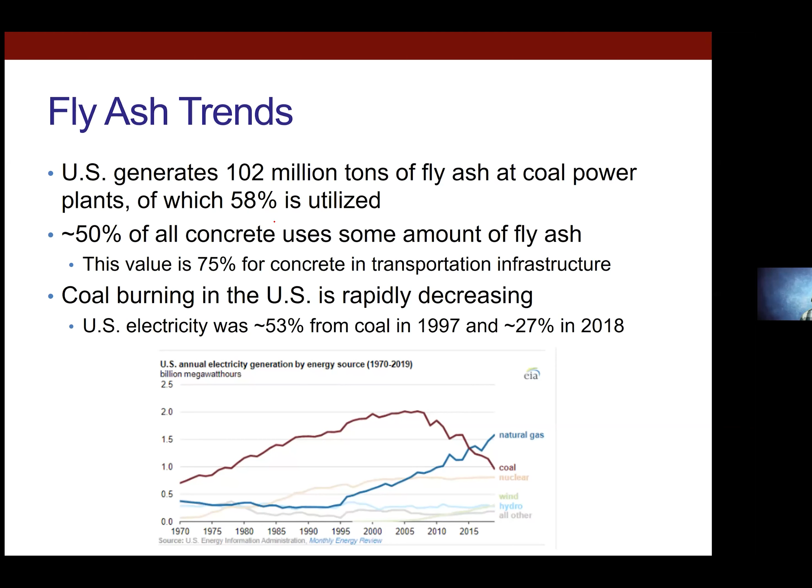So if we get rid of all of our fly ash, what do we do? I don't have the answer. I'm just saying that's kind of where the trends look to be going, so we might need to be nervous about that.

Let's look at slag, granulated blast furnace slag. This is another material that, where it's available, is used a lot. In Virginia, we don't really have a source of it, though you can sometimes import it. I know in Illinois there are some local places you could get it.

Here's the problem: supply currently meets demand, so we don't necessarily have that much extra slag lying around. The other problem is our future trends of blast furnace slag are going to be decreasing.

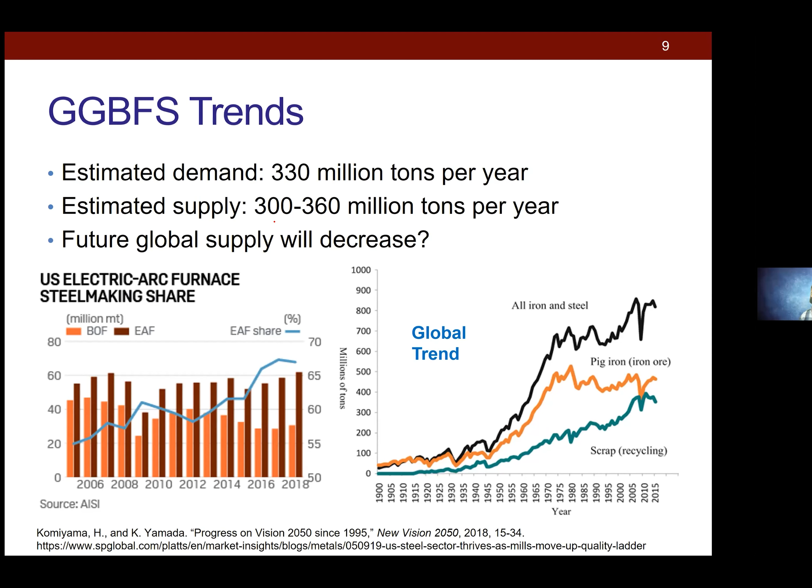If we look in the U.S., well, the U.S. never really produced much pig iron to begin with, but the U.S. is starting to tend towards more electric arc furnaces to produce steel, which is mostly scrap steel recycling, and that seems to be a global trend. So we seem to be recycling steel more than making raw steel from iron ore. That means our sources of blast furnace slag are going to decrease. So again, it doesn't really look like a viable outlook in the future.

What about natural pozzolans? We only produce something like 70 million tons of natural pozzolans worldwide, not enough to replace fly ash. The biggest problem with natural pozzolans is they're highly localized, with highly variable reactivity.

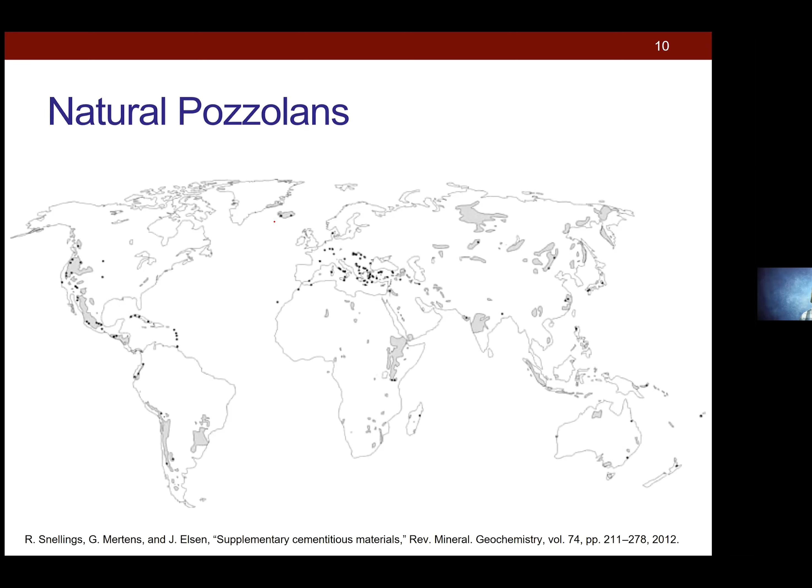Is it a future trend to use more of it? Maybe, but it's going to have to be regional. If we look in the continental US, where I'm in Virginia right now, yeah, there's no source nearby. That means it's going to be probably expensive. It's probably just cheapest to use straight cement at that point. Other parts of the world would be economical. So what's the future? I don't know.

If you look at the future, maybe geopolymers or alkali activated materials. If you're looking at a fly ash or slag-based alkali activated material, you're running into the same issue of supplies. There's a lot of people who like metakaolin, and it seems like a good idea, since the U.S. has some of the highest quality kaolinite clays in the southeastern U.S. and Georgia. We have a huge supply of it, but we're not making very much of it. There's only about 3 million tons produced per year, as opposed to fly ash right now, where we're using something like 100 million tons. So supply is not quite meeting demand yet.

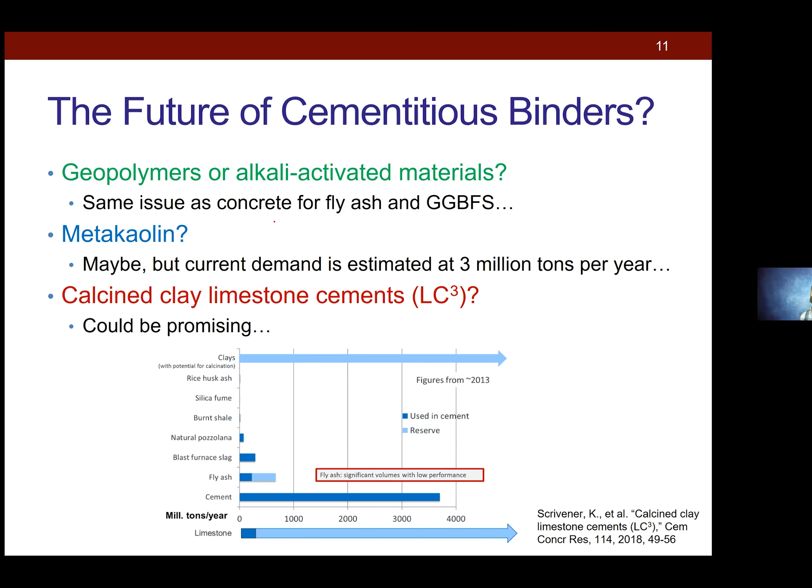Then there's this idea of these calcined clay limestone cements. Those seem promising. I haven't researched them, haven't looked into them. All I can say is what I've seen at conferences and things. So maybe that's where the trends are going. It's hard to say.

Regardless, cement's not going anywhere. Even though cement is the third largest CO2 producer in the world, it's a big industry. The cement sales in the US alone is $10.7 billion, and the US is only the third largest cement producer in the world. The US only produces like 2%.

Something like 2% of the world's total cement, and that's a $10 billion market. If we go to the global market, we're talking $680 billion. Going into the ready mix industry worldwide, it's over $1 trillion. So is cement too big to fail? I don't know, probably. We need cement, we use a lot of cement. So the question is, how do we make it more sustainable?

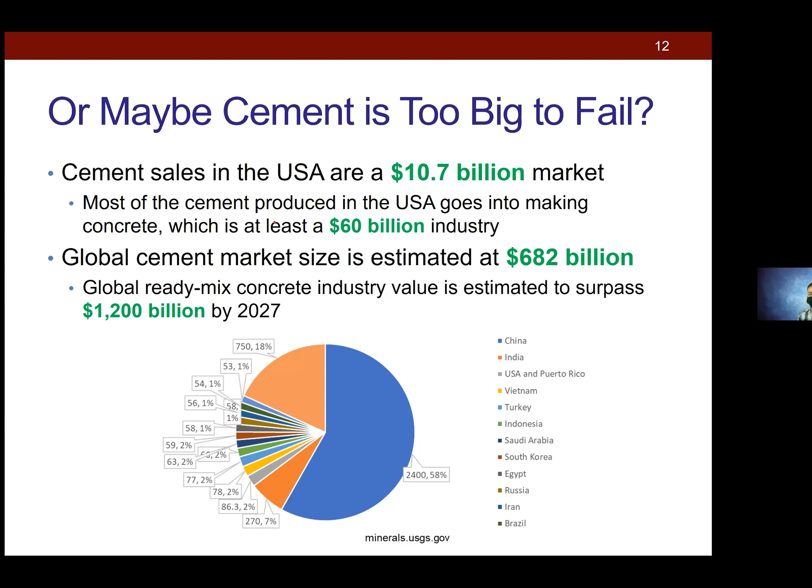If the question is we're not going to have much fly ash or slag going forward, what do we do? So my perspective now is, hey, let's look at these recycled aggregates. Let's just assume that cement's not going anywhere. We're going to be stuck with 100% Portland cement binders moving forward.

It's still going to be producing a lot of CO2. Maybe there'll be other advancements in CO2 sequestration or something. But maybe now we can at least recycle some materials, stop using so much raw materials.

Because we're also looking at other parts of the country that don't necessarily have unlimited supplies of high quality natural aggregates. Virginia is fortunate, we're one of the top 10. I think Virginia is the third largest aggregate producer in the US or something. We produce a lot of high quality aggregates. If you go to other parts of the country, that's not the case. So now they have to pay a lot of money to import it, or maybe they just look to use locally available materials. That's another way now to reduce our costs, reduce our CO2 footprint.

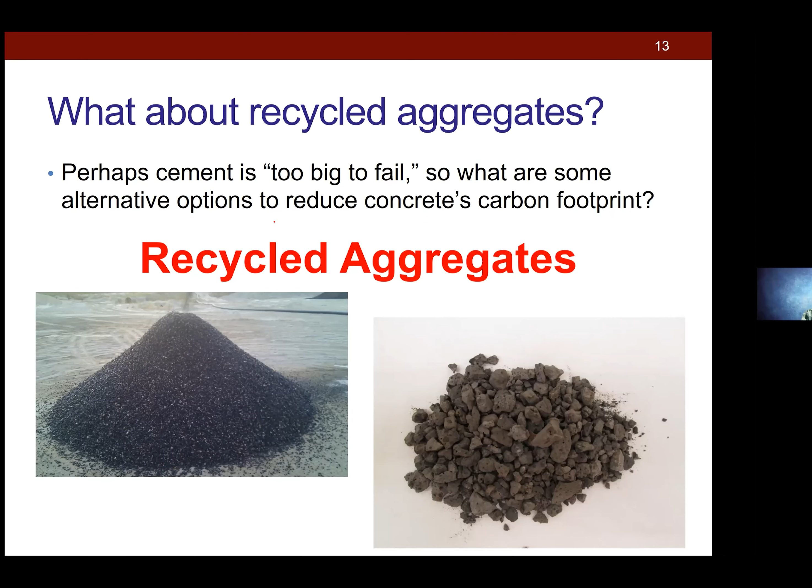So first thing I want to talk about is reclaimed asphalt pavements. This is near and dear to my heart—this is what I spent my master's and my PhD researching.

The idea here is that we produce a lot of reclaimed asphalt pavement in the US, well, in the world, right? I mean, what are the numbers? Something like 94% of all paved surfaces in the US are asphalt, right? So pretty large fraction—we produce a lot of RAP per year.

We reuse a lot of RAP, right? We do use a lot of RAP into new asphalt pavements, but we're limited to maybe something like 15 to 40% by aggregate content. In addition, a lot of the asphalt pavements tend to favor using the fines, which have a higher asphalt binder content. So that leaves a lot of the coarse fraction behind.

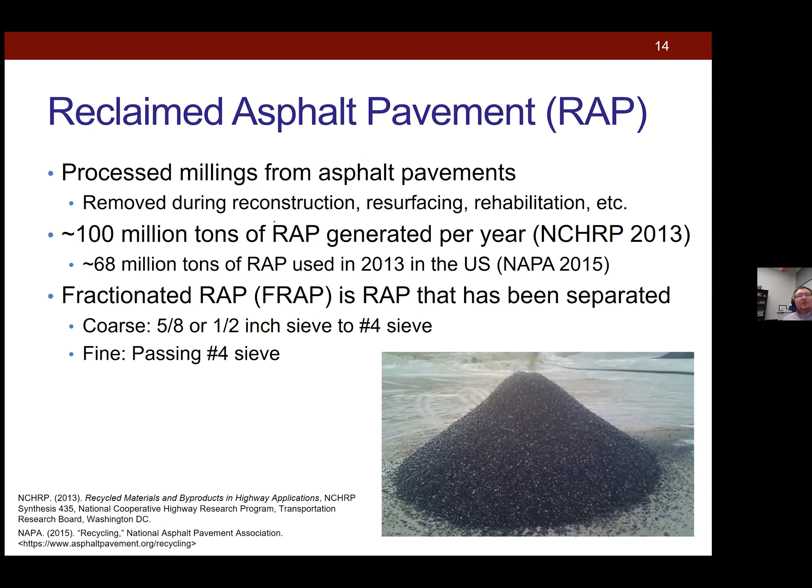So what else can we do with that coarse fraction? Well, hey, let's toss it into concrete. Problem: we reduce our strength, we reduce our modulus. Some other properties don't necessarily seem to be affected too much.

But if we're looking at pavement design, a lot of it is driven purely on strength. If you went to a contractor and said, hey, you can use this aggregate, it's free, you now don't have to pay for the aggregate—but you're going to lose 20% of your compressive strength—well, they're just going to laugh at you and tell you to go away, right?

So the question is, why do we have this decrease? And if we can figure out why we have this decrease, can we then figure out how we can mitigate that decrease, and actually improve the properties?

So this isn't as simple of a problem as just adding silica fume. You can look at a lot of your SCMs—if you add some slag, some silica fume, you typically will densify the ITZ, reduce some porosity, produce more CSH. That all sounds great, but we didn't see that effect with RAP in concrete.

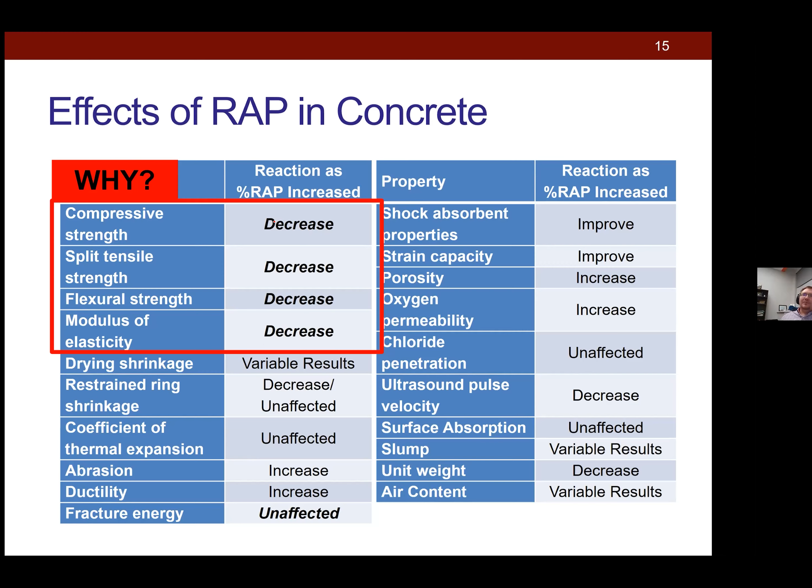I'm not showing that data because we just don't quite have the time, so you just have to take my word on it, or look up some papers. We were finding that no matter what we did to the binder—you can probably reduce the water cement ratio a bit, but it didn't have that great of an effect. So clearly something was going on with the microstructure.

And so this is pretty much where my PhD work went—trying to figure out why microstructurally asphalt is not playing nice with the cement binder.

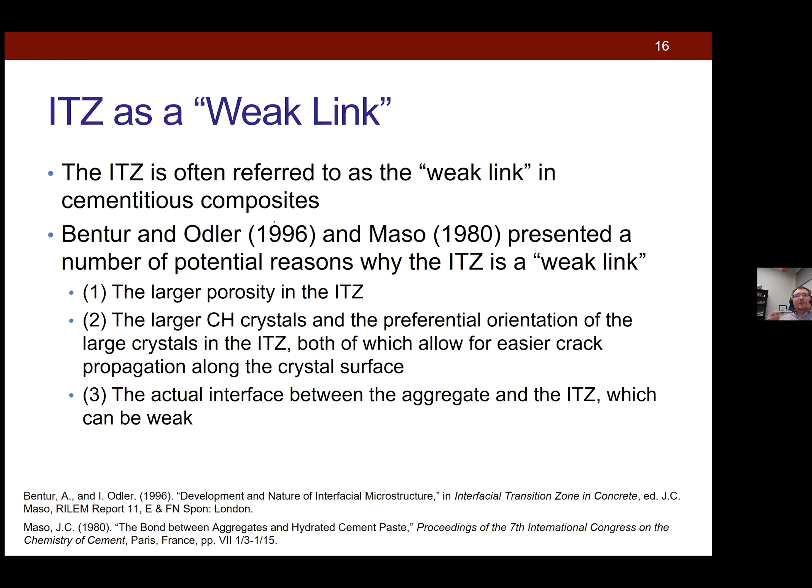If you look at a lot of the historical perspectives on that interfacial transition zone—that's the zone around the aggregates that basically forms due to packing inefficiencies. The ITZ has a higher porosity, so now you have a larger volume of a lower modulus phase in your bulk concrete. You have these larger calcium hydroxide crystals, which some argued would allow for easier crack propagation. And then we have the actual chemical or physicochemical bond between the cement paste and the aggregate surface.

So what I did was pretty much look at one and three—those were really the focus of what I looked at in my PhD.

To study the ITZ, you first have to epoxy impregnate your sample—fill in that void space with epoxy so you're stabilizing the microstructure—and then polish it fairly flat. Then you do scanning electron microscopy, specifically backscattered electron imaging, and based on the grayscale, you can start to pull out different components of the microstructure, and look at the distribution of these phases as a function of distance from the aggregate interface.

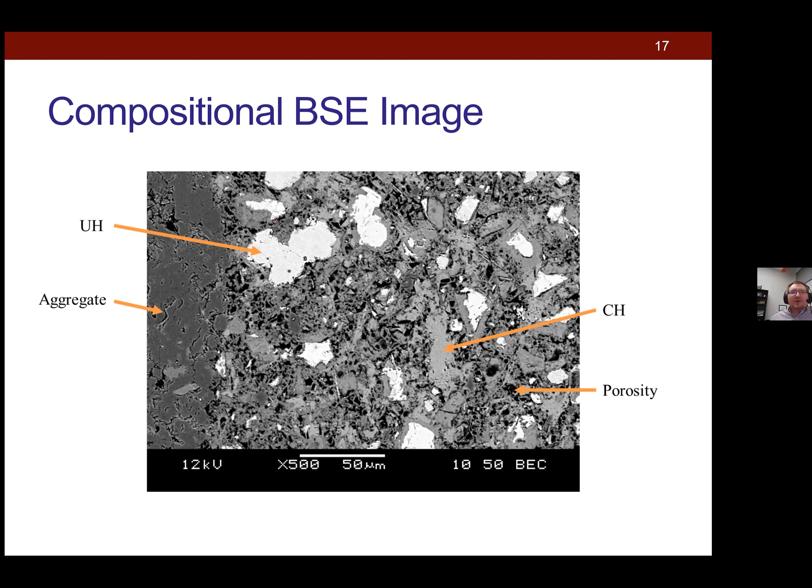This caused some problems because some of the epoxies we would typically use actually acted as a solvent for the asphalt. That meant we had issues with epoxy impregnation, but we eventually were able to successfully epoxy impregnate the sample and develop nice micrographs like this one.

This was a 1-day sample. You can see there's quite a bit of porosity. But already just looking at this image, you can kind of see where this asphalt mastic is, and very close to the interface it appears to have a fairly high porosity relative to the bulk.

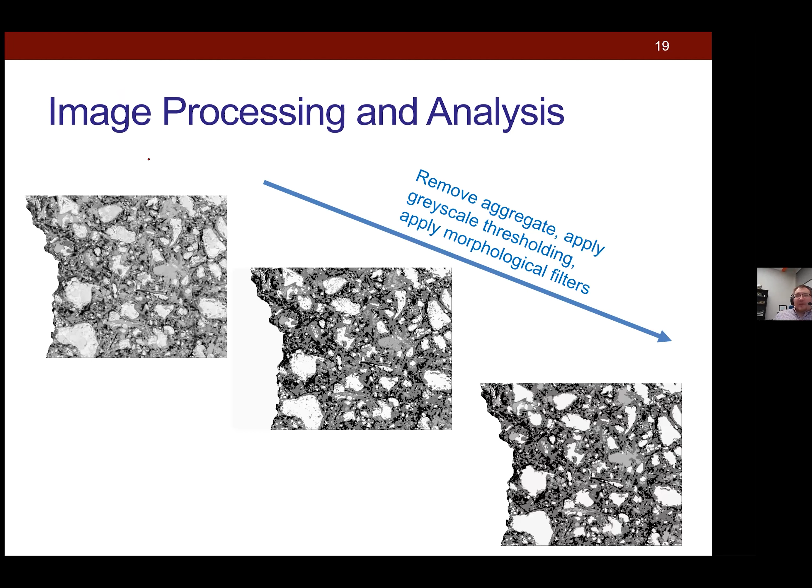So that was already ponderous. What's the cause for that? That's something I'm still looking into. We're running some experiments at Virginia Tech now to try and answer some of those questions. So I don't have all the answers.

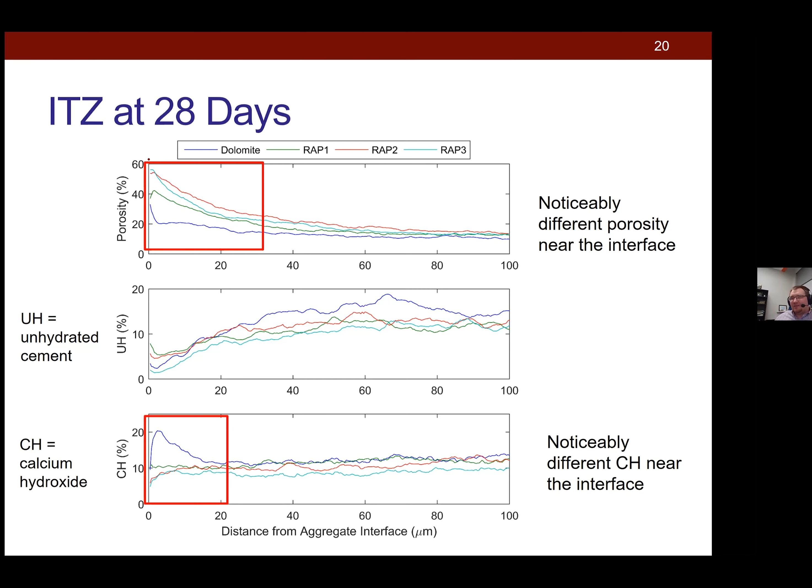But at least empirically, this seems to give a pretty good indication why we are seeing a reduction in strength and modulus. If we just have a larger, more porous ITZ, now if you look at the total volume of your concrete, you have a larger proportion of that volume that's this larger, more porous ITZ. So that already was one thing reducing our modulus.

And then we started looking at the actual bonding energy between the asphalt and the cement. Here we're looking at the surface free energy using the sessile drop method. This was actually one of Al-Qadi's students doing this work at the time, and that's how we got into this to see if we could apply it to this study as well. There might be people at Illinois still doing this type of work, I don't know, but here's the camera that's at ATREL.

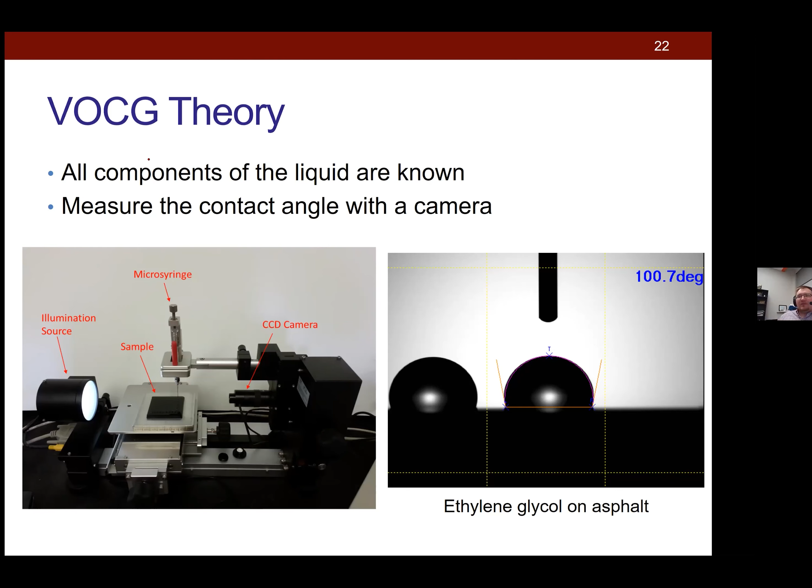We basically had the sample of asphalt. You put these different drops on it. You measure the shape properties of that drop, and you're eventually able to calculate these sort of free energies of adhesion. You can calculate energies of cohesion as well, and calculate some interfacial energy.

I kind of had to skip over a lot of information here, but we found that we could change the interfacial energy between asphalt and cement paste by doing some oxidation to the asphalt. We were able to find that we could make some modifications and actually increase the energy of adhesion. But the problem was we still had that larger, more porous ITZ.

The other problem that's kind of fascinating is that the work of cohesion of the asphalt - the energy it takes to split the asphalt apart - was still less than the amount of energy to split cement from asphalt. So the energy of adhesion was stronger than cohesion. This is telling us that you can do whatever you want to improve the bonding, but it's not going to help you because the cracks are still going to propagate through the asphalt.

This is really why we don't see any effect of, for instance, adding silica fume. Even if you're adding silica fume, yeah, great, you're improving the bulk paste strength and durability. But your cracks are still propagating through the asphalt. You haven't fixed that problem.

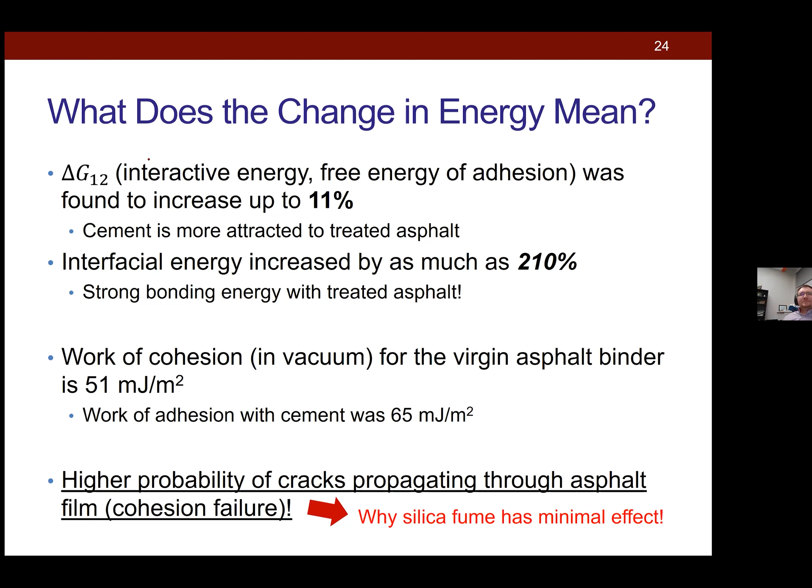So what we're able to conclude is really the sources of problems with RAP were these two issues: that larger, more porous ITZ - and again, great, we found we could reduce the ITZ a little bit with silica fume, not as good as if we did it with a limestone or granite aggregate, but we could improve it a bit - and the problem that your cracks are still going to go through the asphalt film.

So this right away should tell you that maybe we can't really think about concrete with recycled aggregates in the same way that we think of conventional concrete.

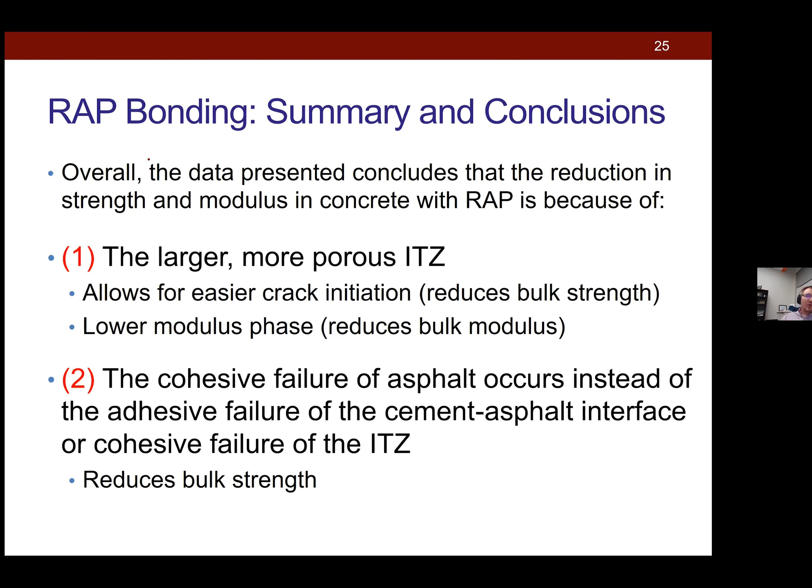Are there any questions on RAP? Because I'm going to switch gears and also talk a little bit about the microstructure of steel slags and recycled concrete. If not, we can talk at the end.

Whatever. How are we on time? Okay.

Do we have a question? I heard some noise. Maybe not.

Alex, I have a question. Before you move so far from my question.

So you calculate the porosity based on the slice that you take the image on, right? That's the 2D slice, correct? So do you think that if you take a sample in 3D, the proportion in 2D is going to be linearly proportional in 3D?

That's absolutely a fairly significant issue, right? The best people have been able to do is Paulo Monteiro, a few years ago, did a sort of ITZ study using nano X-ray CT at the synchrotron, so you're able to get significantly better resolution and was able to pull out the porosity. So if you have this idea of a 3D ITZ, you can pull out more information that way.

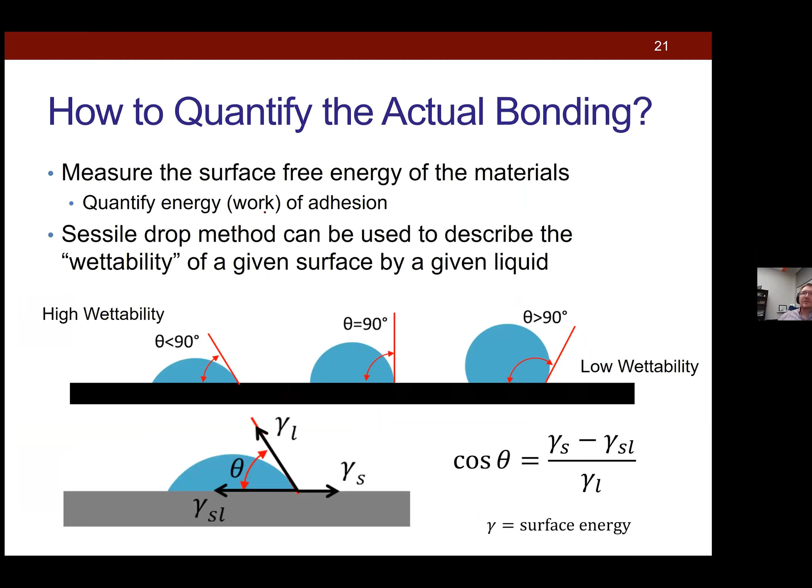That's why we have to assume it. In my liver cell study, we assume it's a circle. Here maybe you have to assume too - of course this is like a polygon, but you can roughly draw a circle around it. Roughly, yes, but again it won't be perfect - the pores are not necessarily discrete or separate or segmented. So where do you draw a boundary for one pore versus the next if they're connected?

That's what you'd have to tell me in detail about the research. Maybe that's why we haven't seen this in ITZ studies. Yeah, maybe - here's what I see.

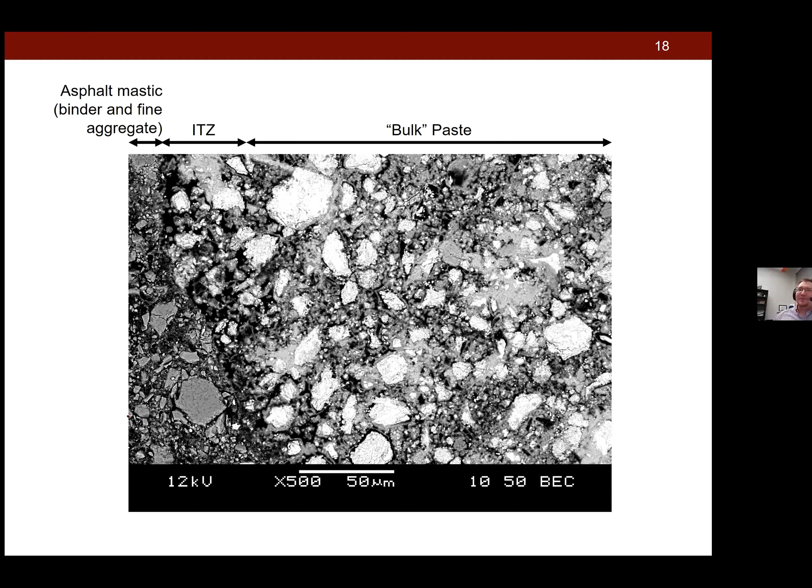Yeah, that's my question. Thanks, Alex. Yeah, so keep me updated what you find, because then we'll see if we can apply it to these complicated microstructures. All right, well, I don't want to keep everyone.

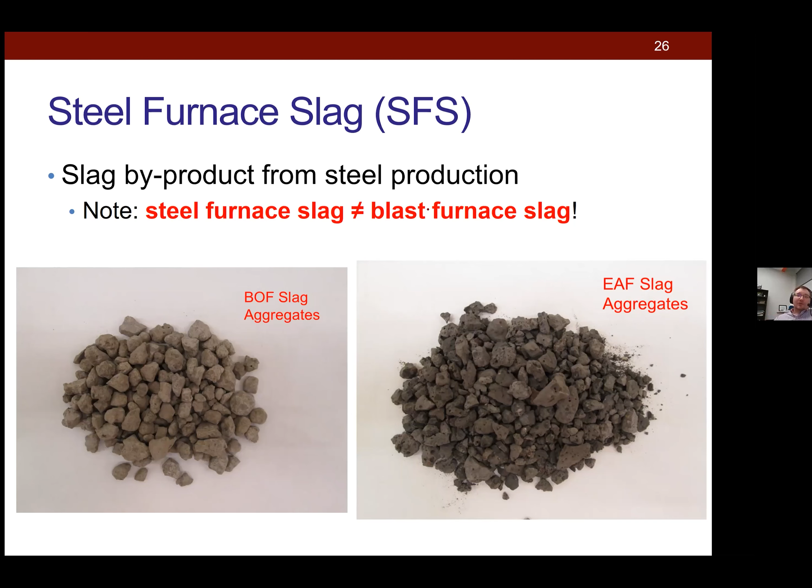This is not cementitious. It can actually be quite expansive, containing a lot of free lime or free magnesia that expands when reacted with water. But otherwise, it's a very hard, durable aggregate. It's mostly been overlooked because there were big failures in the US back in the 80s, so the US basically said forget it, we're not worrying about this stuff anymore, and for the most part in the US it's not really being used.

What we looked at a number of years ago was a handful of different sources of slag — three different types — and compared them to a control of dolomite, a virgin aggregate. We found there's a lot of variability: depending on where the slag came from, you can get either an increase or decrease in strength. In general you seem to get an increase in modulus, probably because it's a higher modulus aggregate, and once you compound that with the composite modulus of the system, you increase the overall modulus. The problem is there's a lot of variability with this material.

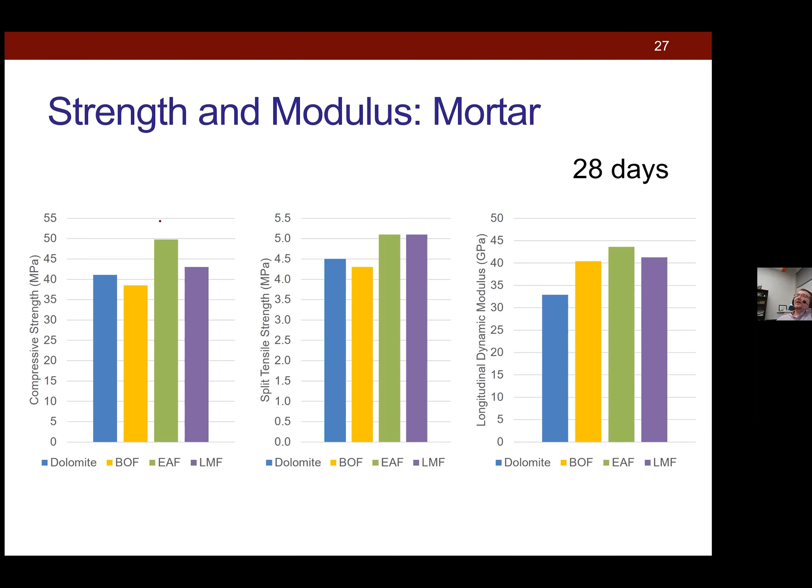Sometimes it can be highly expansive, sometimes non-expansive. Some people have shown there can be reactive phases in the material; others found it entirely non-reactive. So there's a lot of variability, and some of what we're working on now is trying to develop some sort of rapid sequence of tests to decide whether we can or cannot use a specific source in some application.

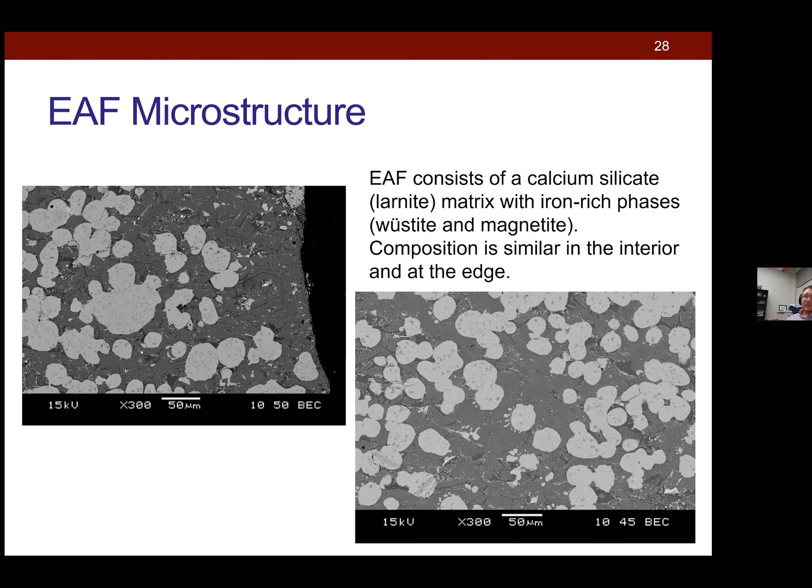When we looked at the microstructure, we did the strength study again and asked why we were seeing these differences. We found that the source that gave us the highest strength, this specific electric arc slag, showed a fairly uniform microstructure without a lot of variability.

Compare that now to the slag that gave us the lowest strength. We found there was an outer layer of high porosity with different composition. In the literature, people have found that composition to be calcite, sometimes calcium hydroxide; one study claimed it was a type of CSH, others say it's a calcium carboaluminate phase. So somehow on the surface of this aggregate we're getting this bulk change in microstructure.

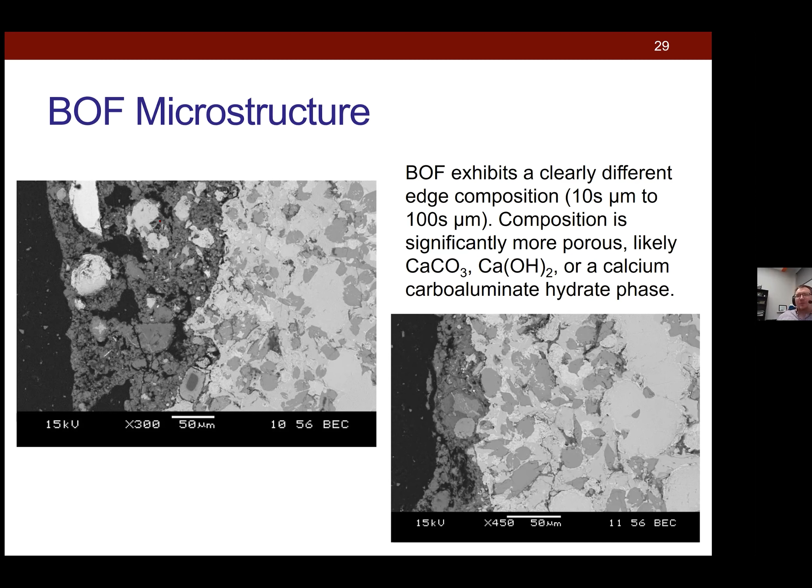We almost have a hard interior of the slag aggregate, and then this sort of ITZ, a weak zone, which then bonds to the cement paste, where there's going to be another ITZ. That's probably why we saw reductions in strength with this material. The other slag type we looked at just had really variable composition.

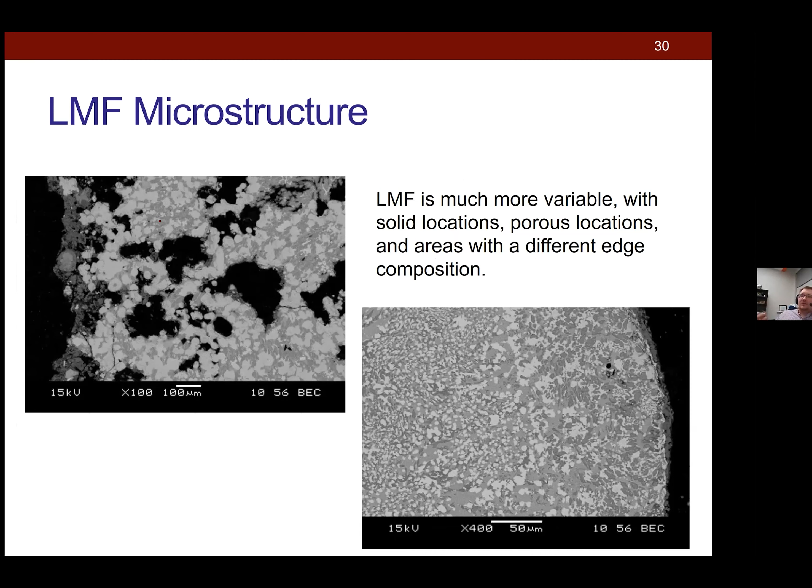Some sections were very porous, some sections had that same surface-altered layer, and other sections were very hard, condensed, and fairly uniform — so a lot of high variability here. When we then looked at the ITZ again, much like before, we saw similar porosity distribution issues.

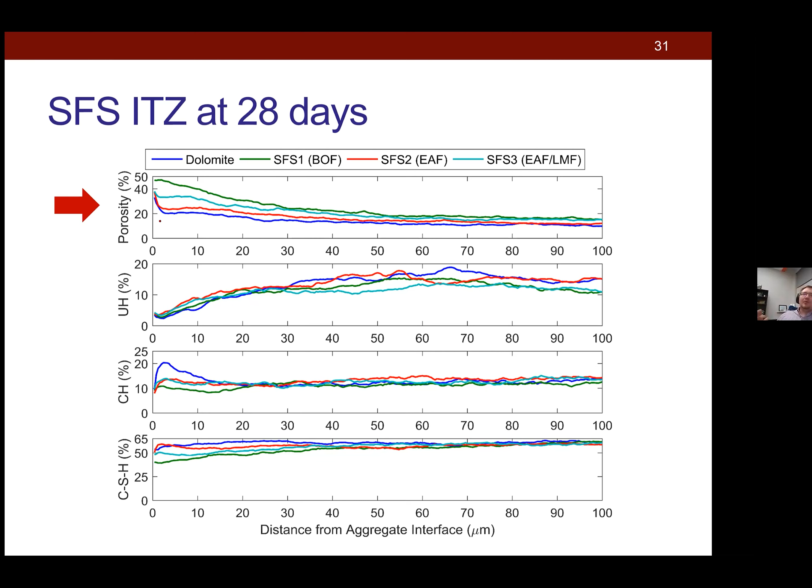So that steel slag number 2, we found the ITZ actually behaved fairly similarly to our control, the dolomite, right? And that's the one that gave us the highest strength increase. Whereas the BOF and the LMF, slags 1 and 3, those both had some reductions in strength relative to that. We did find there was higher porosity there too, so that's another way we can relate why we've been seeing those reductions in strength.

So really what we were able to conclude from steel slags is some of them are great. Some have excellent mechanical interlock, are fairly non-reactive, non-expansive, and would probably perform exceptionally as an aggregate in concrete. But because there are these other sources that behave terribly...

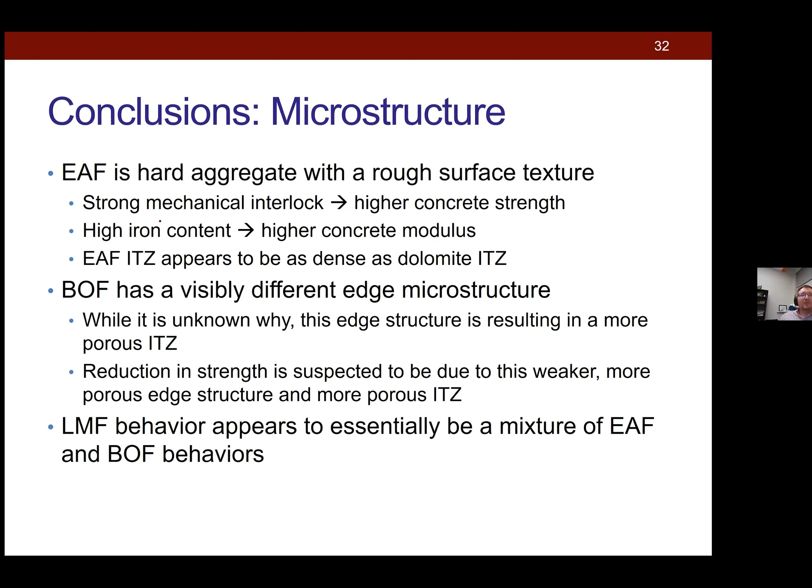How do we actually pick which one to use? Or if you're just going at it blind and say, let's use it and not study how it's going to perform, now you have to think about how do we modify our design to account for that variability. Or maybe we just say we're not going to use any steel slag at all, and carry on as we have for the past 20, 30 years, just not use it.

Okay, last one I want to talk about real quick is recycled concrete. Recycled concrete is interesting because now you have a lot of variability in the composition. You have your old aggregates, your old mortar, and you can have these old ITZs. If the material was undergoing some durability issue, now you can have some latent ASR. Maybe you have high chloride contents, high sulfate contents. Localized microcracking, maybe from the crushing operation. So there's a lot of variability with recycled concrete aggregates.

And this is another reason you can talk to some people in the industry that say, I'm not going anywhere near recycled concrete, it has way too much variability, we can't predict it. And is that the future we have to look forward to? Are we just going to carry on business as usual? I don't know.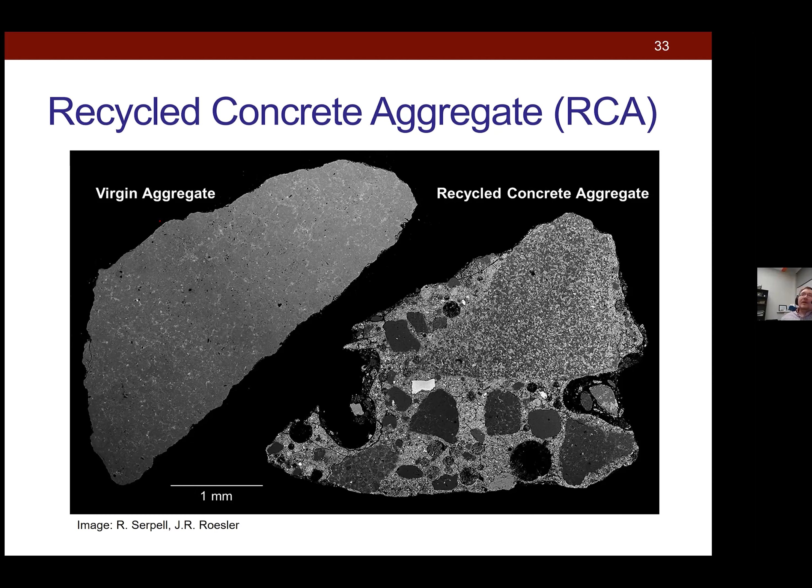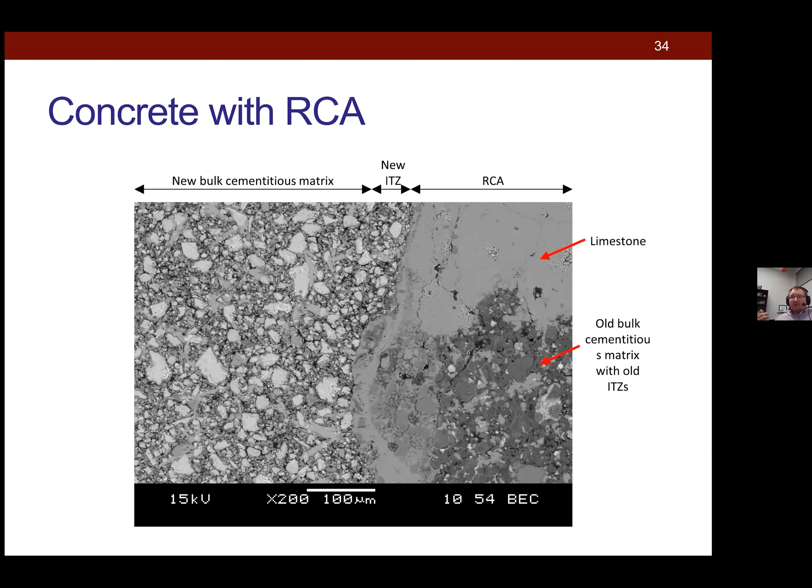So here's kind of, we can see these old and new ITZs. So that was one of the challenges we see with RCA, that's one thing. So now you can have this sort of weak plane in the old aggregate from the old ITZ, but then you can also have these weaknesses with the new ITZ.

Biggest problem with RCA that I would argue is the absorption capacity. RCA will absorb a lot of water. We've looked at RCA fines that have moisture absorption anywhere from 6-7%. We looked at one even up to 12%. So if you don't account for that when you're mixing your concrete, you can run into a lot of issues.

If you don't measure the moisture content of your RCA and you don't account for this moisture difference and you mix your RCA dry into your concrete, guess what? That RCA is going to want to suck up all of the water that's supposed to be there for your cement hydration. That's going to cause a lot of issues.

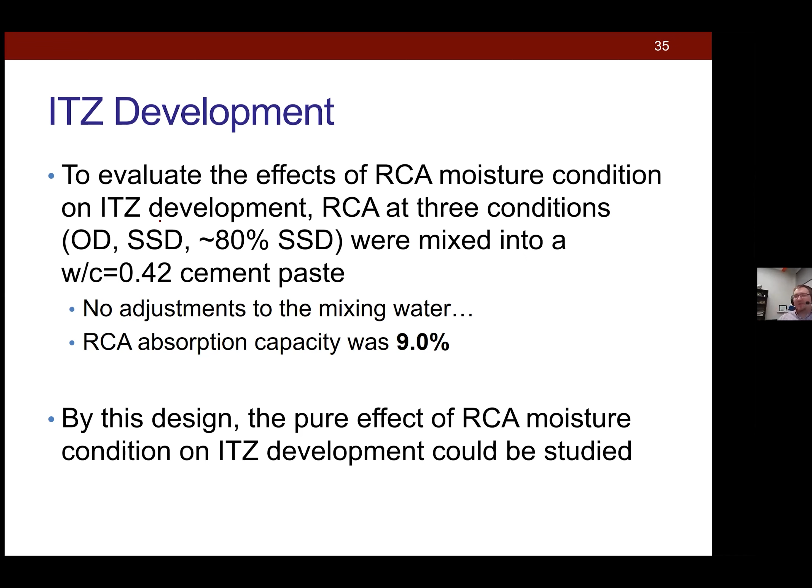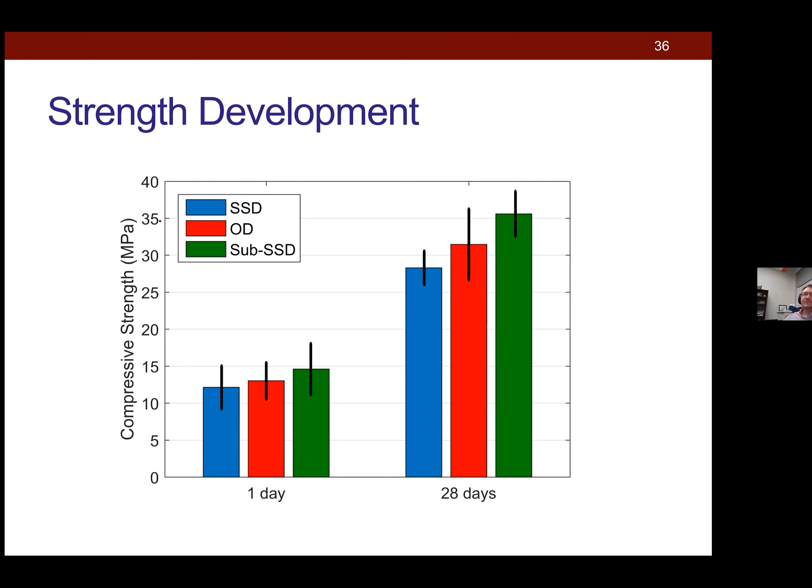So that's what we were looking at in this study. We basically took a 0.42 water cement ratio cement paste, and we didn't change the moisture there. Then we took RCA that's saturated, oven dry, or like 80% SSD, and mixed that as is into the paste. Yes, I know that's sacrilegious, we're not accounting for the moisture content there, but that's what we were trying to study. We're trying to figure out what happens if you mix an oven dry RCA that wants to absorb 9% moisture. What's that going to do to your local water cement ratio? The answer is it's probably going to screw things up quite a bit.

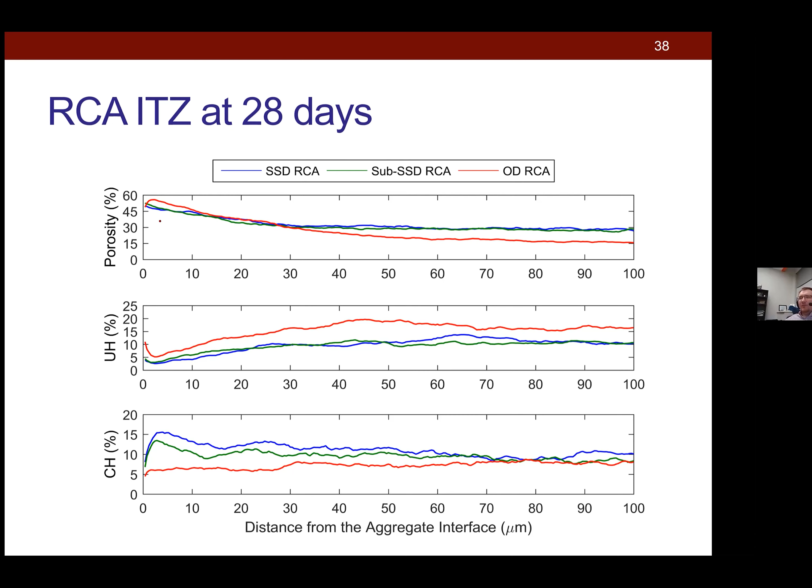So if you look at studies that have looked at these different moisture contents, we find there's a lot of variability. Typically, your best strength and best durability concretes are when your RCA is at this sort of sub-SSD condition, kind of like 80% SSD. So it still absorbs some moisture from the microstructure. One idea is that it kind of sucks in some cement paste, and so you get this sort of better mechanical interlock. Whether or not that's happening we don't entirely know for certain, but that's one of the going ideas in the literature. We're at least able to show that the aggregate moisture content, the RCA moisture content, seems to have an influence here, and that's something we should be concerned about.

The other problem is if your RCA is completely dry and wants to absorb, let's say, 9% moisture, if you mix that RCA dry into your concrete and then adjust your batch water, the problem is RCA doesn't absorb all that moisture that quickly. Studies have shown it might take 24 to 48 hours for RCA to become fully saturated. So it's kind of a useless method to try and just adjust your mixing water, because now you're just changing your local water-cement ratio. You're actually going to be reducing your strength.

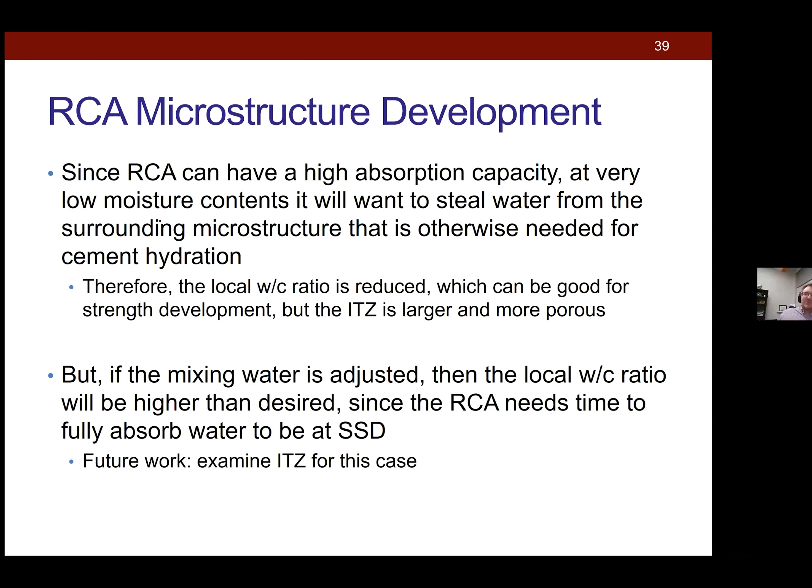So here again, we can't necessarily carry on with the same assumptions for conventional concrete as we do with RCA, and that's really where my conclusions are going. So if we use these recycled aggregates, can we use them? Should we use them? The answer is yes and no. I'd like to tell you that the answer is simply yes, but in reality it's yes and no.

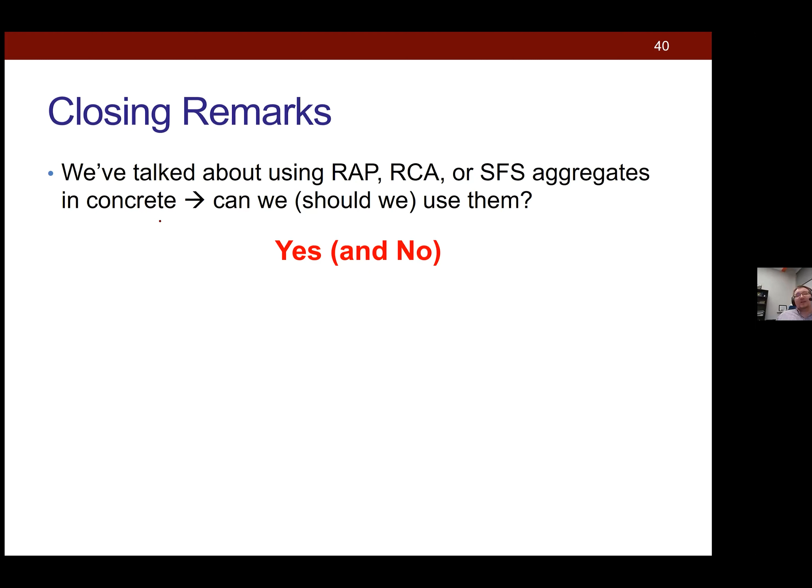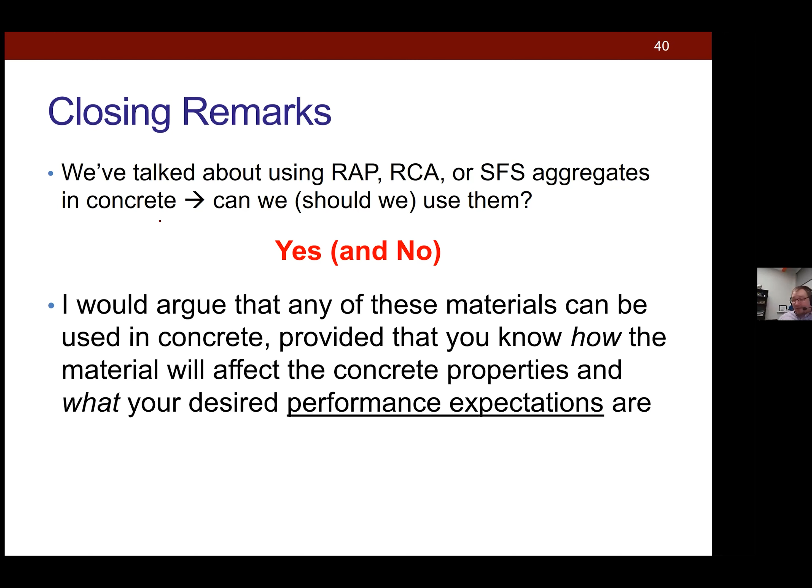Yes, you can use it in concrete. There's nothing stopping you, no physical barrier stopping you from using it. But you need to adjust your performance expectations. Concrete with recycled aggregates is not going to behave the same way as conventional concrete. As long as you know that and understand that, we might be able to come to a better consensus on how to use these.

So again, you can't treat these materials the same. The failure modes are different, the microstructural behavior is different. We talked about how cracks in concrete with RAP still propagate through asphalt cohesion, through the asphalt film. That's not something we really have to worry about with, let's say, a limestone aggregate or a granite aggregate. So if these failure mechanisms are different, do we need to start changing our design procedures?

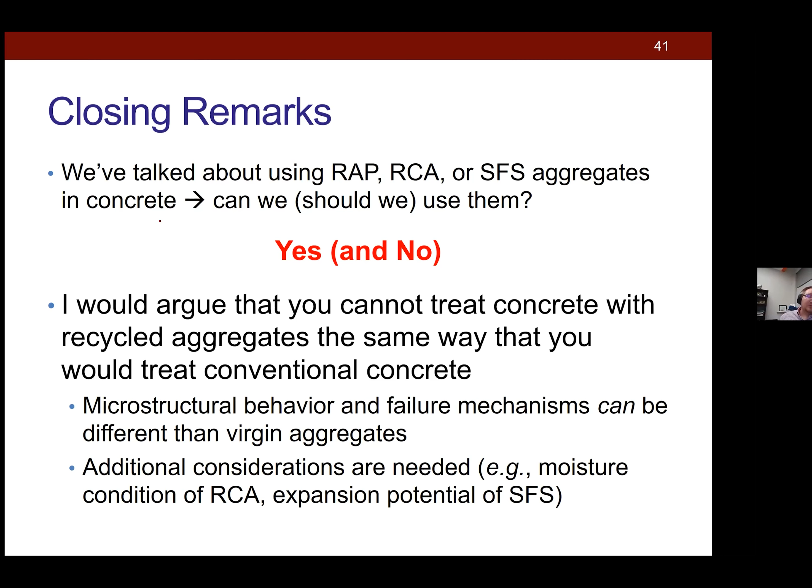And lastly, the mechanical performance here, again, since the failure mode is different, measuring strength and modulus is not giving you the whole picture. If we had more time, I'd talk a bit about the slab capacity study we did, because we showed that even though concrete with RAP had a lower strength and a lower modulus, its slab capacity was actually increased relative to the control.

Lower modulus was able to sort of withstand greater strains. It also has a greater fracture energy. That asphalt film can actually absorb a lot of fracture by basically sucking in those cracks and having the cracks propagate around the asphalt. It can absorb a lot of energy. So the fracture properties can be improved by using RAP.

So again, if our slab capacity is improved, that tells us we don't necessarily have to change our pavement thickness design. But if you go to a conventional design methodology based on strength, it tells you that you have to build a thicker pavement section. So again, the closing picture is, if we use these recycled materials, we have to think about them differently. We might have to start characterizing our concrete performance based on different metrics. And that's kind of all I really wanted to cover.